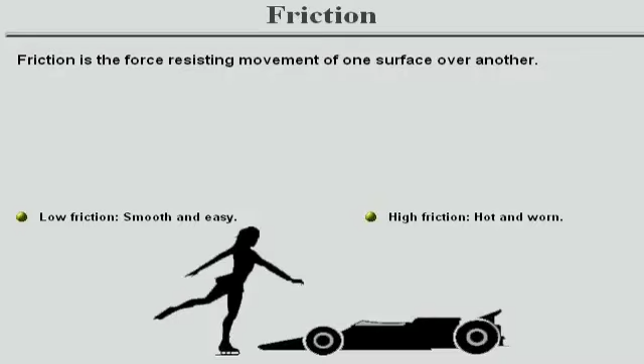When unlubricated surfaces move, the asperities deform elastically or plastically and can weld together if load and speed conditions are sufficiently severe. The harder the surfaces are forced together, the greater the friction and wear.

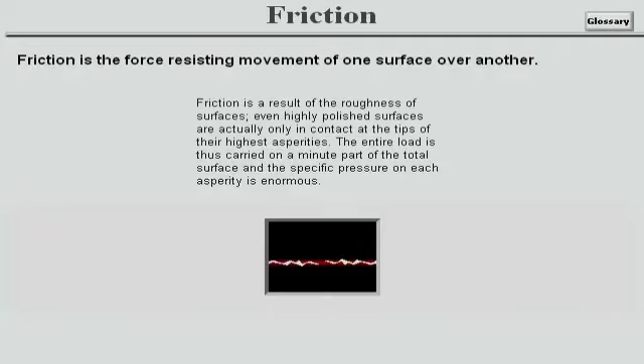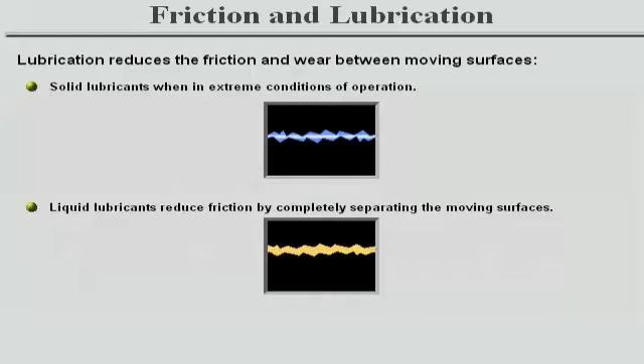Graphite, molybdenum disulfide, or chemical coatings are used to prevent metallic contact when extreme conditions of operation preclude any possibility of utilising fluid lubricants. Liquid lubricants are used to reduce friction to low values when design features permit formation of an oil film of sufficient thickness.

There are applications where, although the establishment of a sufficiently thick fluid film is not possible, suitable oil additives can be used.

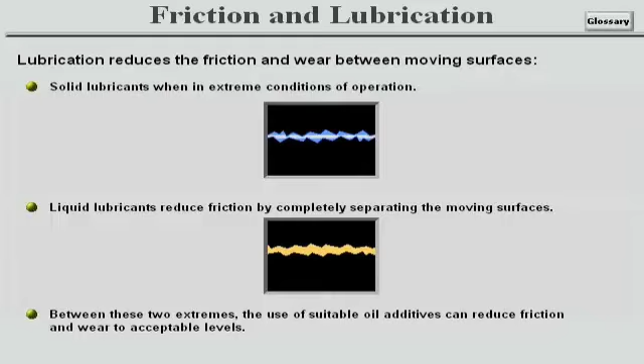Lubrication may thus be conveniently classified into three categories: boundary lubrication, in which a considerable degree of contact occurs between the mating surfaces; mixed lubrication, where formation of a fluid film is partly established; and hydrodynamic or full fluid film lubrication, where the contact surfaces are completely separated by an oil film.

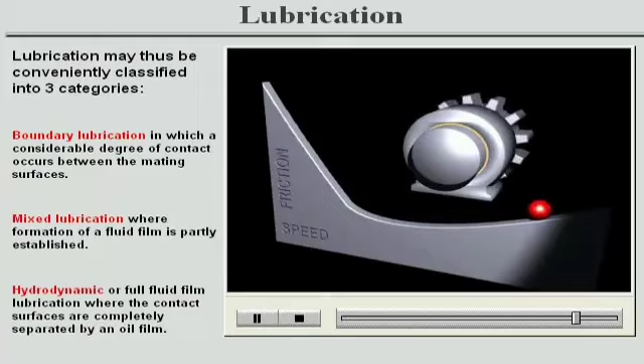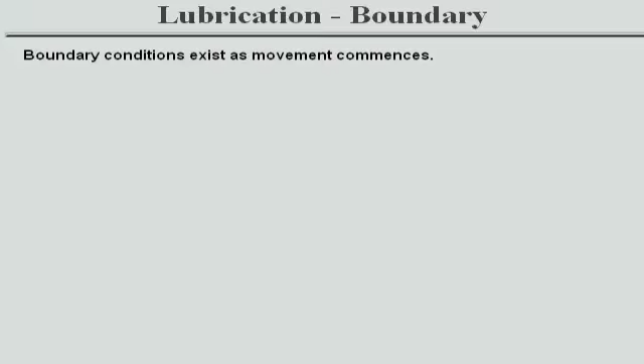The boundary conditions exist as movement commences from rest, and friction between mating surfaces is high due to frequent metallic contact. The entire load is carried by a lubricant film considerably thinner than the surface roughness.

The friction is far lower than for unlubricated surfaces. Friction and wear are determined by the properties of the surface layers, that is, physically adsorbed oil additives, chemically bound surface films, etc. The viscosity of the lubricant is of minor significance at boundary conditions.

When metal surfaces slide over each other under boundary conditions, there will normally be some degree of metallic contact. This is transformed into heat, which gives rise to local flash temperatures.

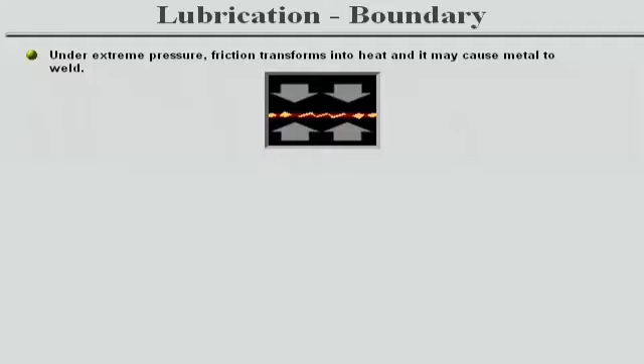If loads are too high or speeds too low, dangerously high local temperatures will be obtained, causing the metal to melt at the asperities concerned.

To avoid welding at the surfaces, metal transfer and subsequent seizure, extreme pressure or EP additives are incorporated into certain types of lubricants, such as oils for heavily loaded turbine gears.

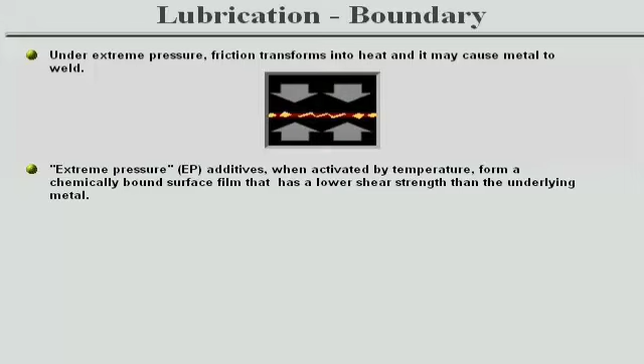These additives are activated by local high flash temperatures and react spontaneously with the metal surfaces, forming a chemically bound surface film. The adherent surface film, which has a lower shear strength than the underlying metal, reduces friction to an acceptable level and protects the metal substrate.

EP additives vary in chemical composition and reactivity, but they are intended for use with ferrous metal surfaces and may cause corrosion of other metals.

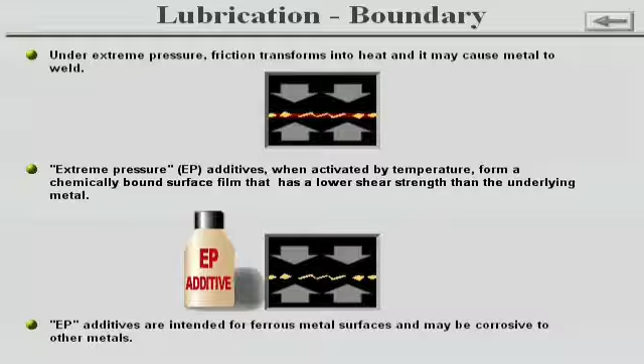As speed increases, there is progressively less contact and friction between the surfaces. This is the region of mixed lubrication, where the thickness of the lubricating film approximates to the roughness of the surface.

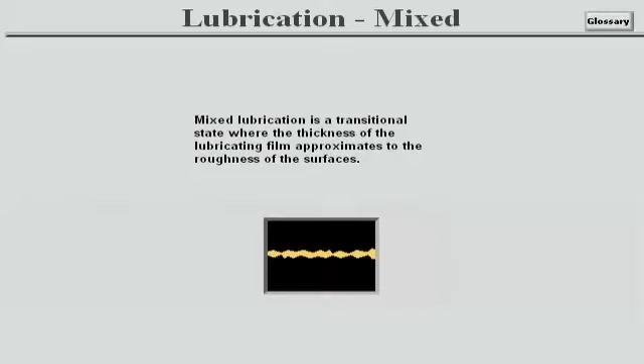Hydrodynamic lubrication is achieved when the relative speed of the surfaces is sufficiently high to form an oil film significantly thicker than the surface roughness, separating the two surfaces.

The thickness of the film is proportional to the lubricant viscosity. Therefore, higher viscosity is required for heavy load, low speed, high temperature, or conditions involving shock loads or vibrations. Various formula and nomograms are available for calculating the lubricant viscosity requirements.

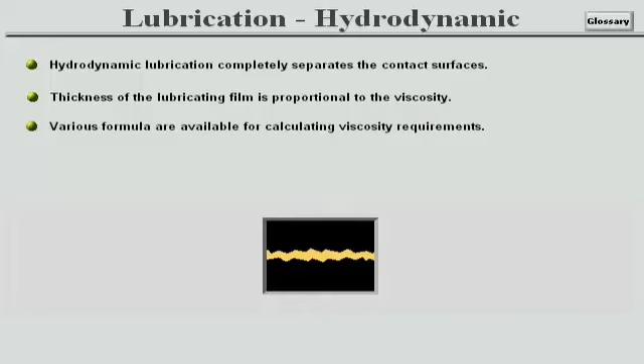EHL is a special form of hydrodynamic lubrication developed for heavily loaded rolling contacts, such as roller bearings and some gears. Lubricant is squeezed into the contact area and subjected to extremely high pressure.

The very high pressure results in tremendously increased viscosity of the lubricant, thereby significantly improving load carrying capacity. The contacting surfaces are elastically deformed, thereby distributing the load over a far greater area.

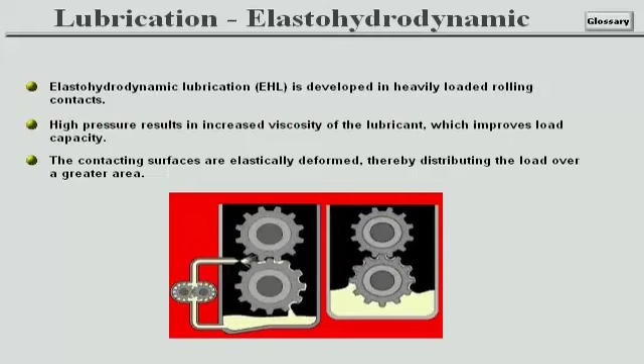Let us summarise some of the topics. Lubrication reduces friction, wear and resulting power losses. It also transports heat produced by friction.

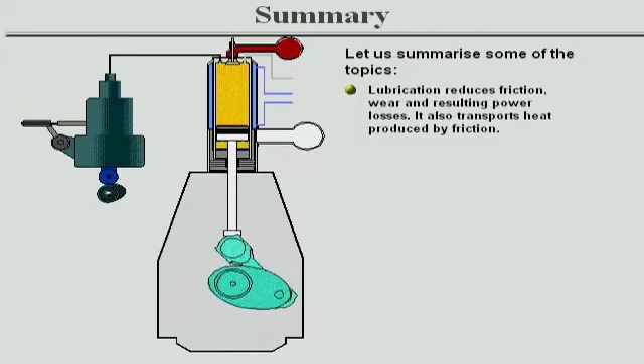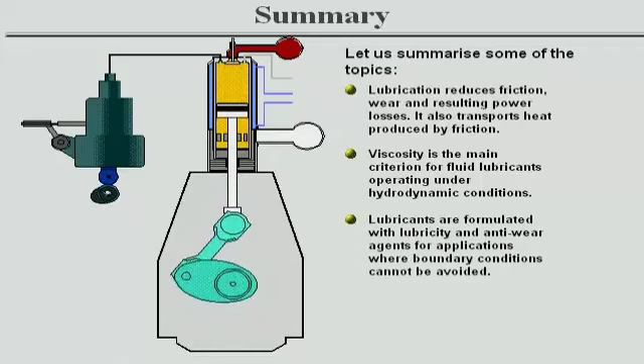Viscosity is the main criterion for fluid lubricants operating under hydrodynamic conditions. Lubricants are formulated with lubricity and anti-wear agents for applications where boundary conditions cannot be avoided. Active EP lubricants are required for extreme conditions of high load or low speed.